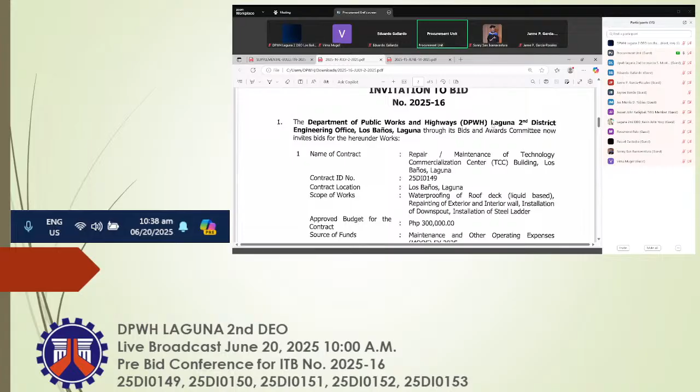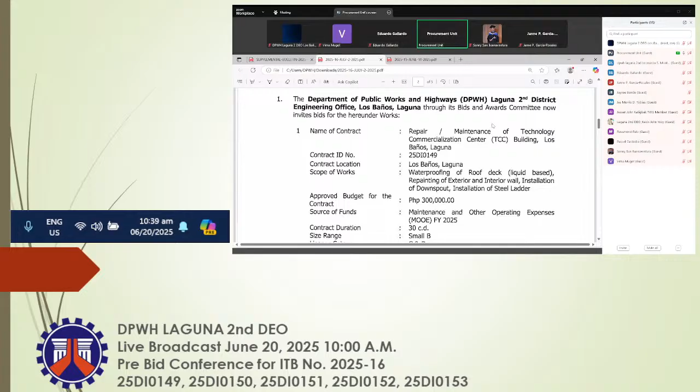For invitation to bid number 2025-16, our first project: Repair Maintenance of Technology Commercialization Center, TCC Building, Los Banos, Laguna, with contract ID number 25DI0149, with approved budget for the contract amounting to 300,000 pesos.

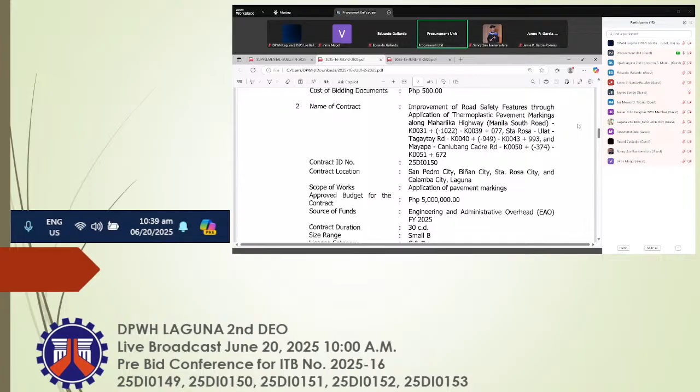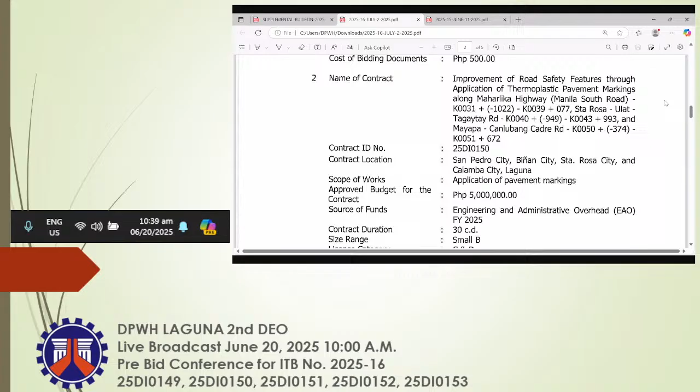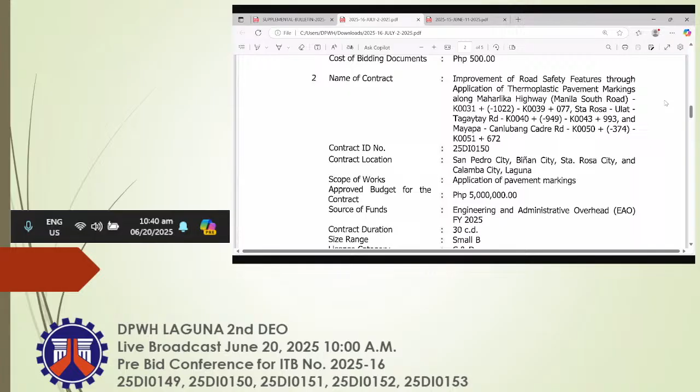Next, improvement of road safety features through application of thermoplastic pavement markings along Maharlika Highway, Manila South Road, kilometer 31 plus minus 1022 to kilometer 39 plus 077; Santa Rosa, Ulat, Tagaytay Road, kilometer 40 plus minus 949 to kilometer 43 plus 993; and Mayapa, Canlubang, Cadre Road, kilometer 50 plus minus 374 to kilometer 51 plus 672. With contract ID number 25DI0150 and approved budget for the contract of 5 million pesos.

For our third project, asphalt overlay along Calamba, Santa Cruz, Famy Junction Road, kilometer 57 plus 939 to kilometer 57 plus 986, with contract ID number 25DI0151, with approved budget for the contract amounting to 4,075,000 pesos.

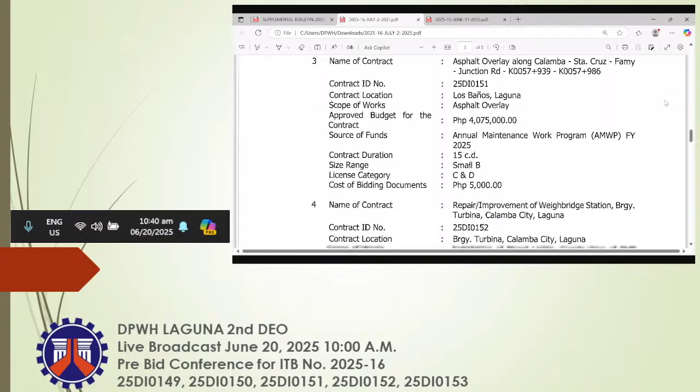Next, repair improvement of Weighbridge Station, Barangay Turbina, Calamba City, Laguna, with contract ID number 25DI0152 and approved budget for the contract amounting to 5 million pesos.

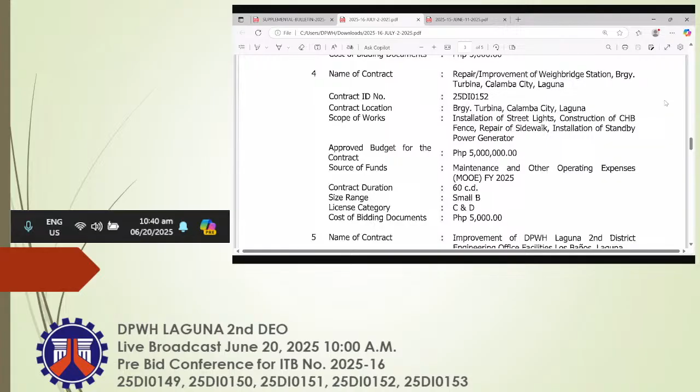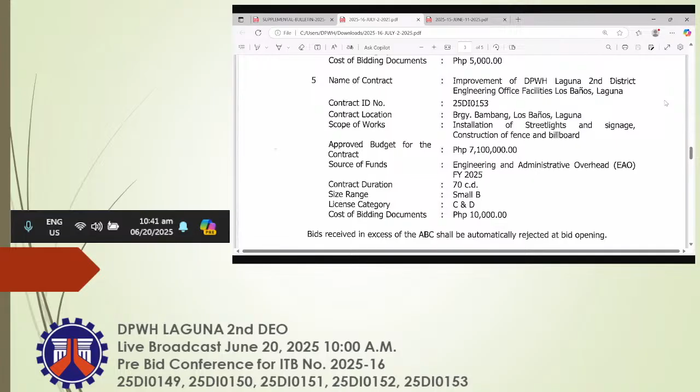And our last project, improvement of DPWH Laguna 2nd District Engineering Office Facilities, Los Banos, Laguna, with contract ID number 25DI0153, with approved budget for the contract amounting to 7,100,000 pesos.

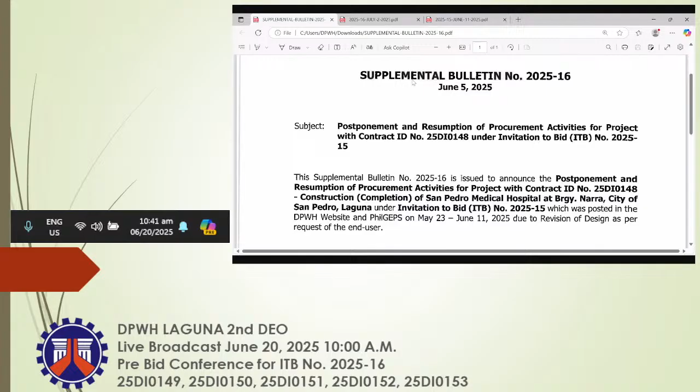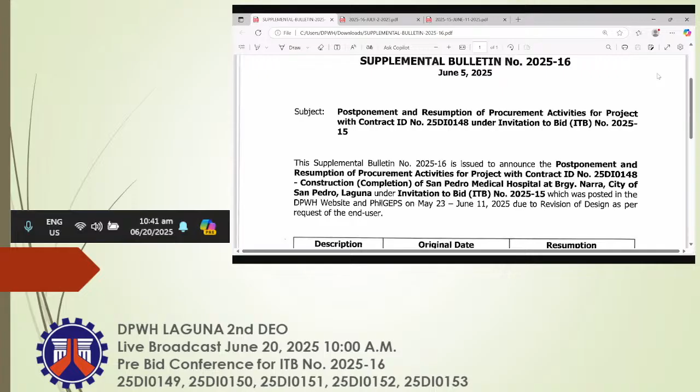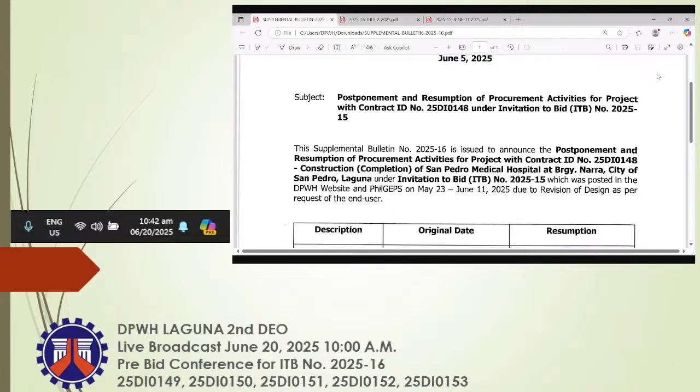We have supplemental bulletin number 2025-16, subject: postponement and resumption of procurement activities for project with contract ID number 25DI0148 under invitation to bid number 2025-15. This supplemental bulletin is issued to announce the postponement and resumption of procurement activities for project with contract ID number 25DI0148, construction completion of San Pedro Medical Hospital at Barangay Narra, City of San Pedro, Laguna, under invitation to bid number 2025-15, which was posted in the DPWH website and PhilGEPS from May 23 to June 11, 2025, due to revision of design as per request of the end user.

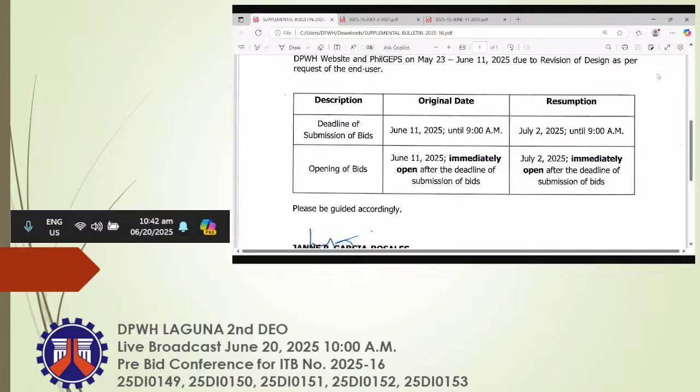Deadline of submission of bids: original date June 11, 2025 until 9 a.m., resumption July 2, 2025 until 9 a.m. Opening of bids: original date June 11, 2025, immediately after the deadline of submission of bids; resumption July 2, 2025, immediately after the deadline of submission of bids.

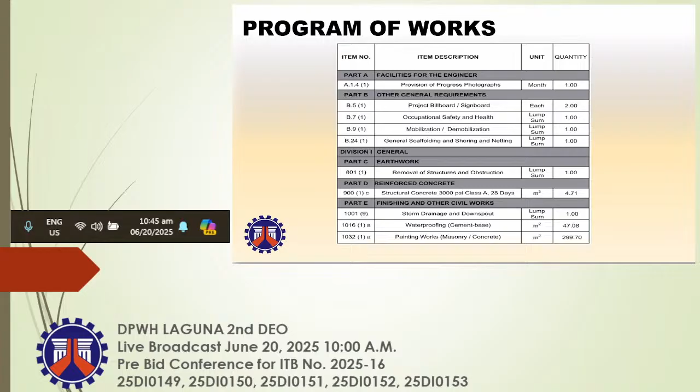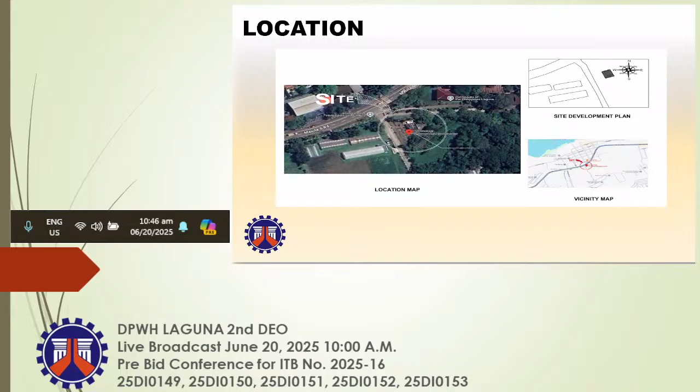Here's the plan and scope of works to be done on our building: repainting of exterior and interior walls, and waterproofing of the roof deck.

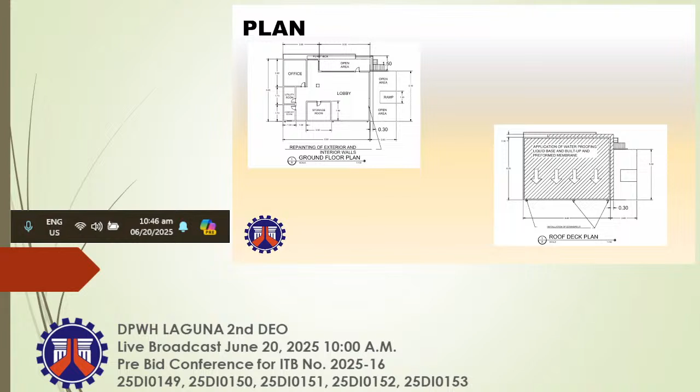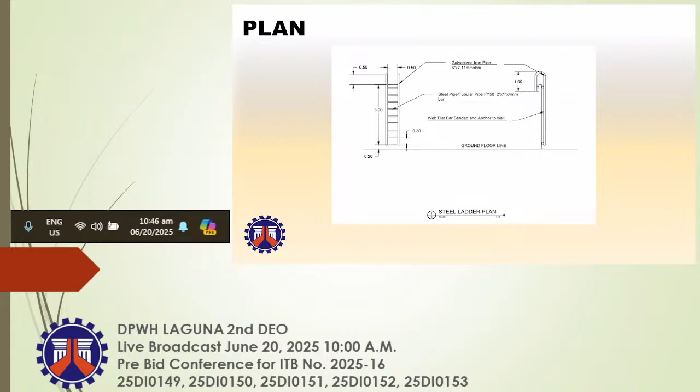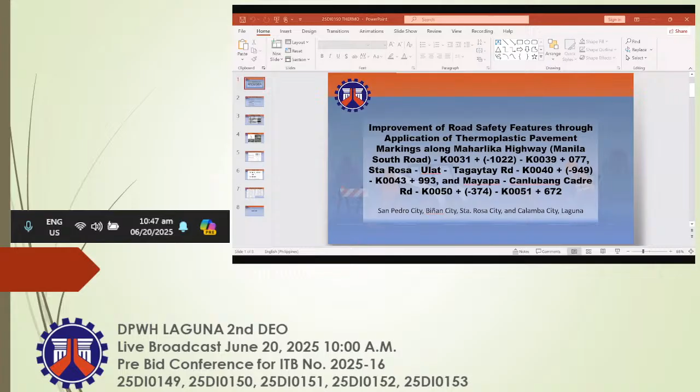For the second project is the improvement of road safety features through application of thermoplastic pavement markings along Maharlika Highway, Manila South Road, from kilometer 31+022 to kilometer 39+077; Santa Rosa Ulat Tagaytay Road from kilometer 40+949 to kilometer 43+993; and Mayapa Canlubang Cadre Road, kilometer 50+374 to kilometer 51+672.

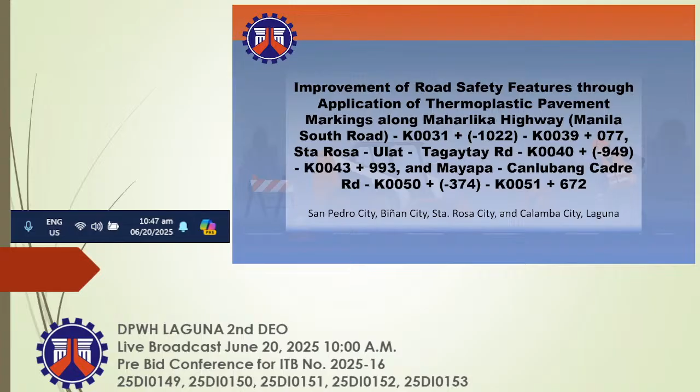Project information: the project has a net length of 7.79 kilometers. Project description: application of thermoplastic pavement markings on national roads, with an ABC costing 5 million pesos. Project duration is 30 calendar days.

Here's the program of works. For part A, provision of progress photographs. Part B, project billboard signboard, occupational safety and health program, traffic management, and mobilization/demobilization. For part H, reflectorized thermoplastic pavement markings in white and in yellow.

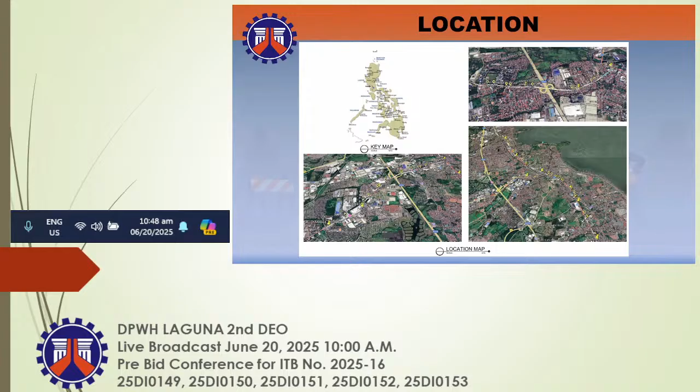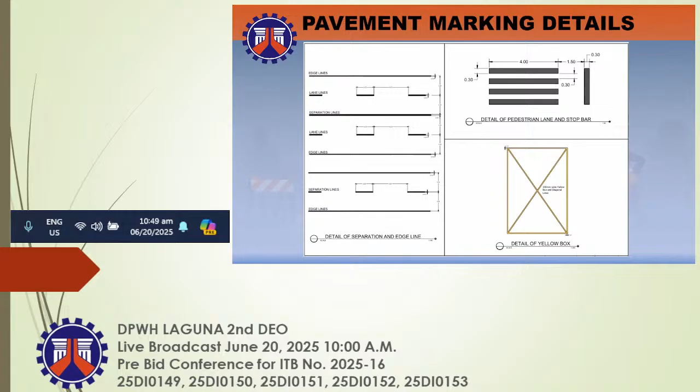Here's the location of the project. Details of the separation and edge line, pedestrian lane, stop bar, and detail for the yellow box. Here's the layout plan.

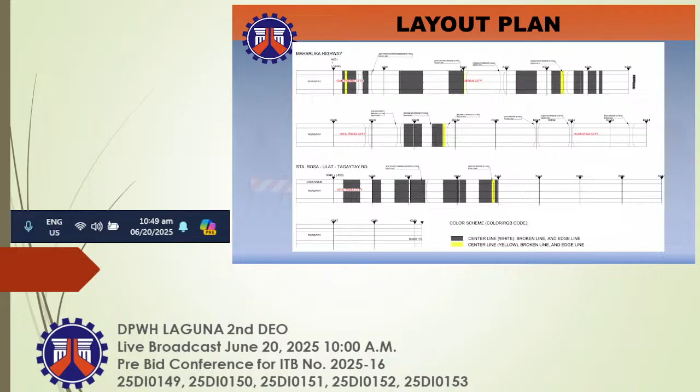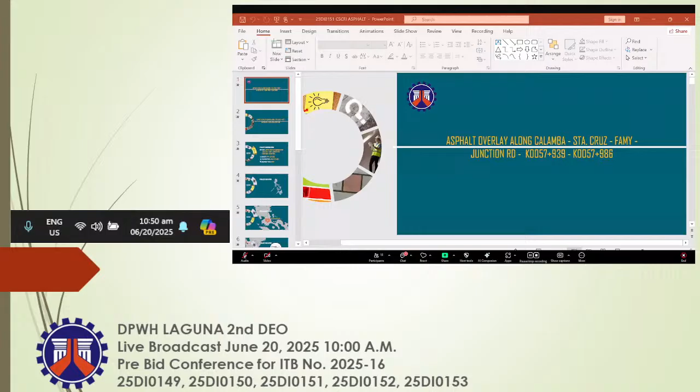The third project is asphalt overlay along Calamba, Sta. Cruz, Famy Junction Road from kilometer 57+939 to kilometer 57+986.

As mentioned earlier, the project amounts to 4,075,000 pesos. Source of fund is the WFP.

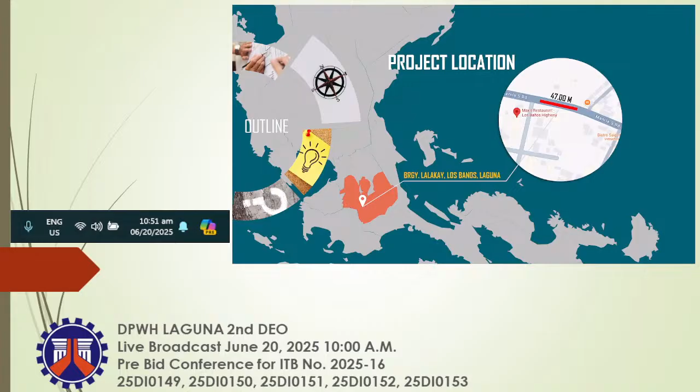Project location is Barangay Lalakay, Los Banos, Laguna, near Max's restaurant, for a stretch of 47 meters.

Item of works: Part A, provision of photographs. Part B, project billboard signboard, occupational safety and health program, and traffic management. Part C, removal of actual structures and obstruction.

Part D, aggregate sub-base course. Part E, emulsified asphalt and bituminous concrete surface wearing and binding, and Portland cement concrete pavement (PCCP), 0.28 meter thick. Miscellaneous works include reflectorized thermoplastic pavement markings in white.

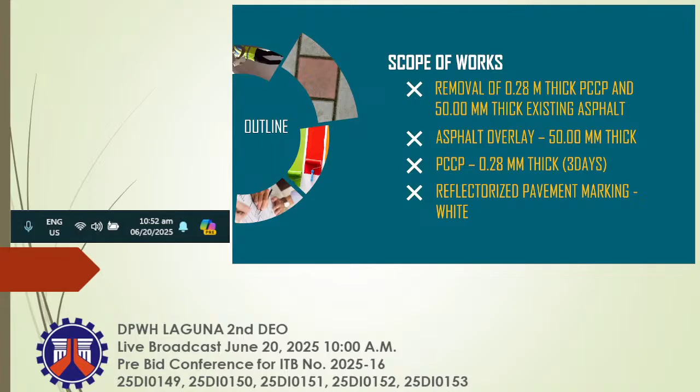The outline includes removal of 0.28 meter thick PCCP and existing 50 mm thick asphalt overlay, construction of a new 0.28 meter thick PCCP, and reflectorized pavement markings.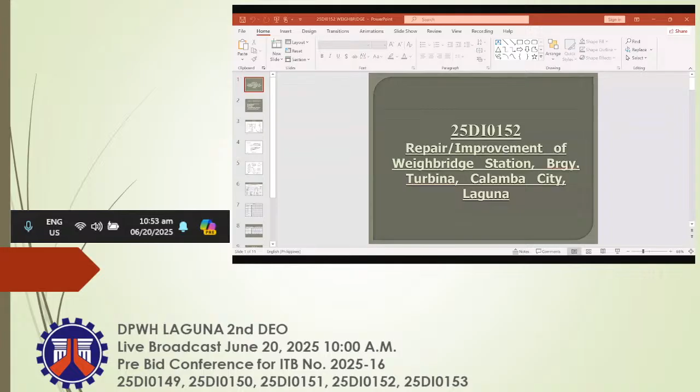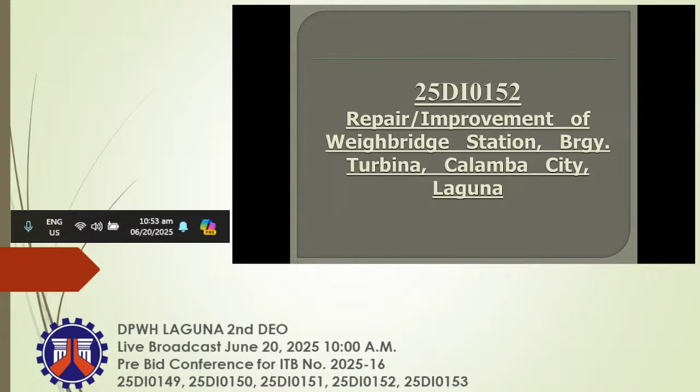For the fourth project, with contract ID number 25DI0152: repair and improvement of Weighbridge Station, Barangay Turbina, Calamba City, Laguna. Project allocation, ABC is 5 million pesos, duration 60 days.

Scope of works: installation of street lights, construction of CHB fence with painting, repair of sidewalk, and installation of standby power generator.

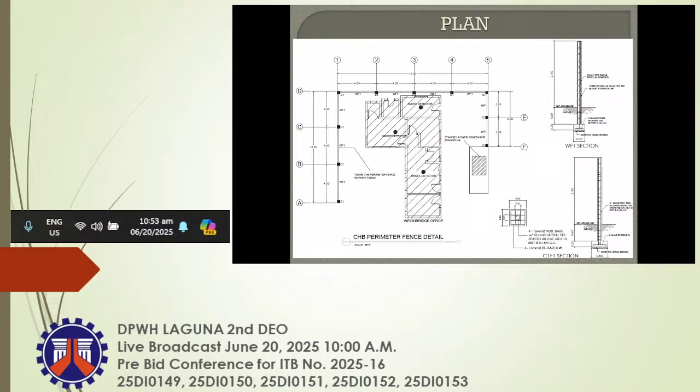Here's the plan for the perimeter fence with details. Here's the location of the street lights, and the sidewalk rehabilitation.

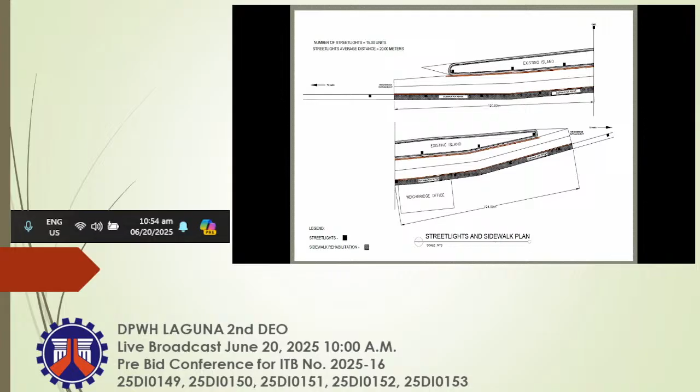Here are the street light details, typical street light details. And here's the program of works.

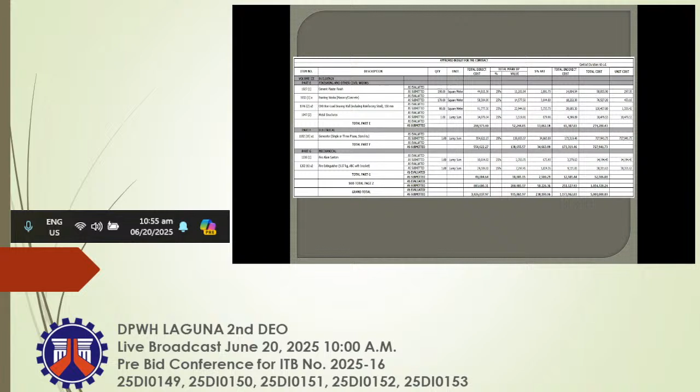For the buildings portion: cement plaster finish, painting works, CHB non-load bearing wall, and metal structures. Part F covers the generator. Part G is the fire alarm system and fire extinguisher.

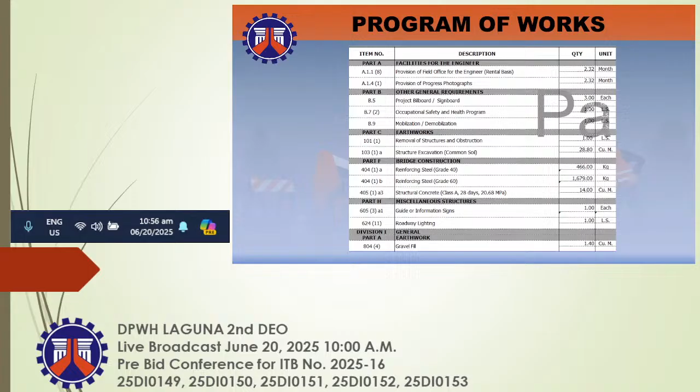The program of works: Part A, provision of field office of the engineer, and progress photographs. Part B, project billboard signboard, occupational safety and health program, mobilization and demobilization. Part C, removal of structures and obstruction, structure excavation. Part F, reinforcing steel grade 40 and grade 60, and structural concrete, 28 days, 21 megapascal. Part H is guide or information signs and roadway lighting.

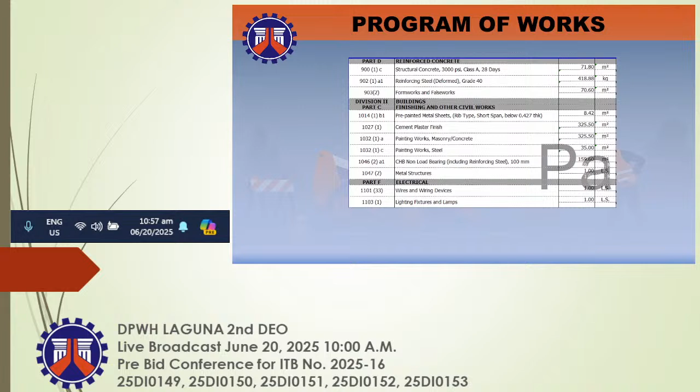In Division 1, Part A, earthwork gravel fill. Part D, reinforced concrete, structural concrete, reinforcing steel, formworks and false works. In Division 2, Part C, pre-painted metal sheet, cement plaster finish, painting works, masonry concrete and steel, and CHB non-load bearing 100 mm thick, and metal structures. For Part F, wires and wiring devices, lighting fixtures and lamps.

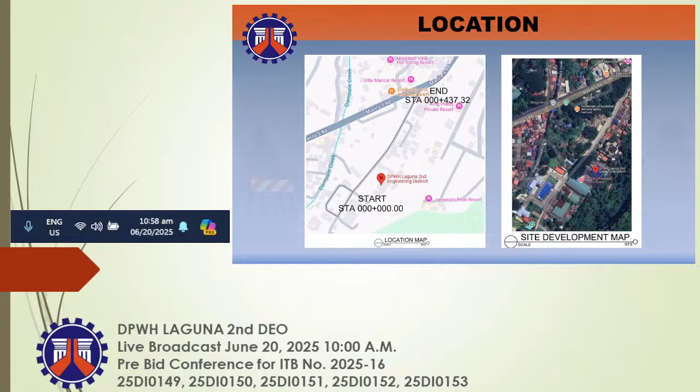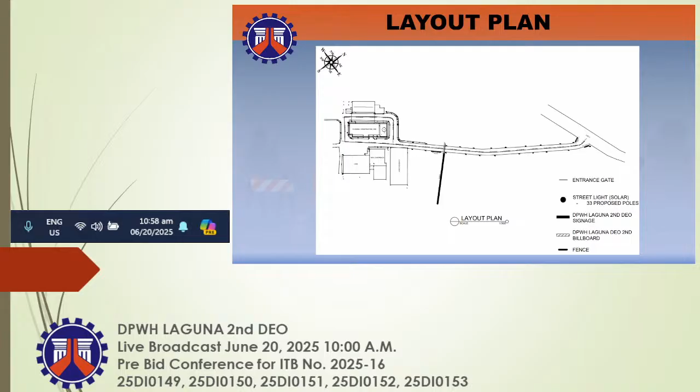So this is the location of the project here at the office. For the layout plan, the legend shows the entrance gate, street light, signage, DPWH Laguna 2nd DEO billboard, and the fence.

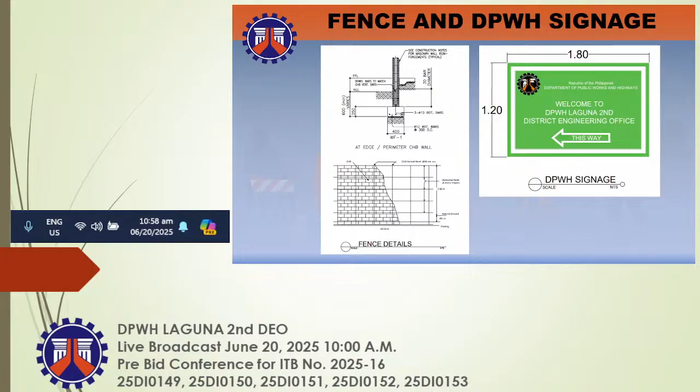If there are any concerns and questions. That's the final project. Thank you.

Good morning everyone. I will discuss the major category of works and the PCAB category for those interested or prospective bidders who want to join our bidding. Please just take note of this.

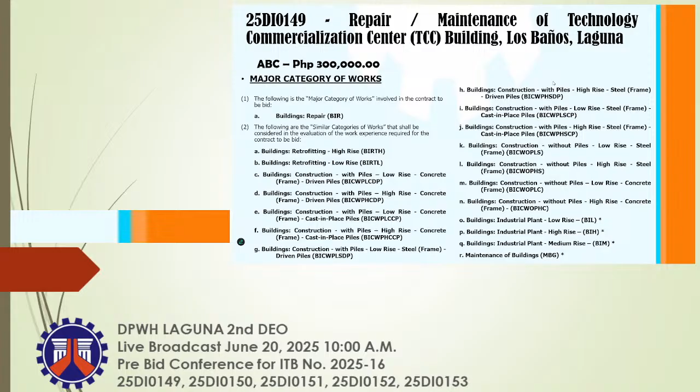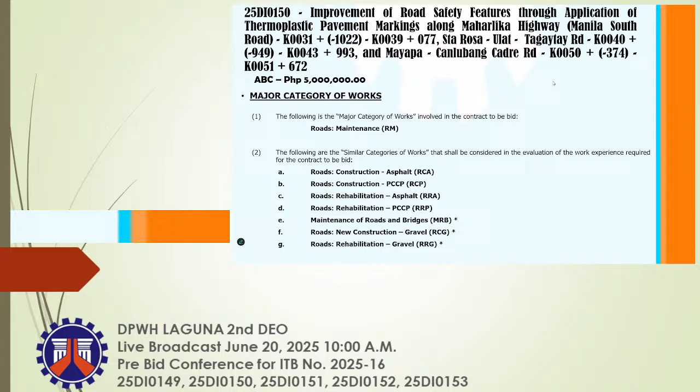For the next project, 25DI0150, improvement of road safety features through application of thermoplastic pavement markings along Maharlika Highway, kilometer 31 plus negative 1022 to kilometer 39 plus 077, Santa Rosa-Ulat-Tagaytay Road, kilometer 0040 plus negative 949 to kilometer 043 plus 993, and Mayapa-Canlubang-Cadre Road, kilometer 0050 plus negative 374 to kilometer 51 plus 672, with an ABC of 5 million pesos. The major category of works for the following are mostly roads maintenance, construction, and rehab. If you wish to join, your PCAB license should have a license category of C&D and classification of Small B.

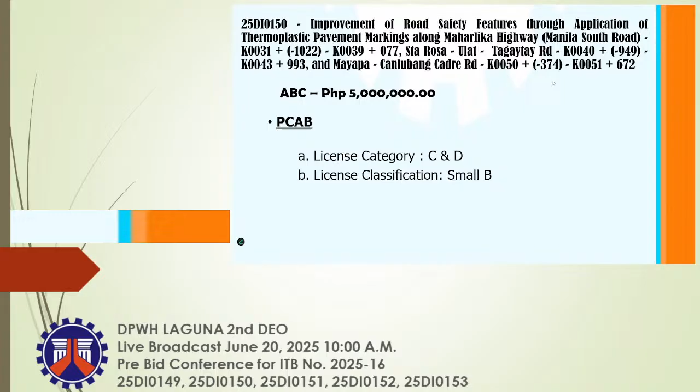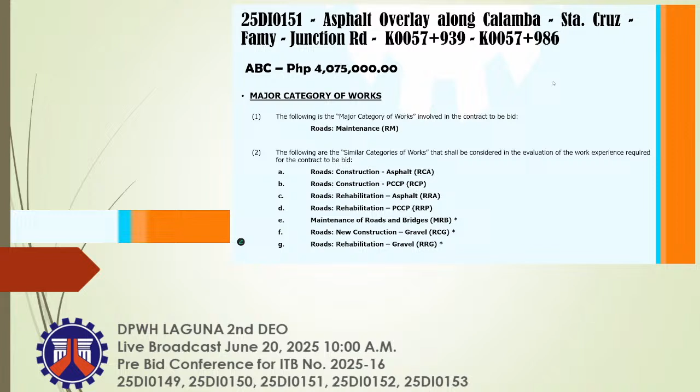For the third project, 25DI0151, asphalt overlay along Calamba-Santa Cruz-Famy Junction Road, kilometer 57 plus 939 to kilometer 57 plus 986, with an ABC of 4,075,000 pesos. The major category of works are the following. If you want to join our bidding, your PCAB license should have a license category of C and D and classification of Small B.

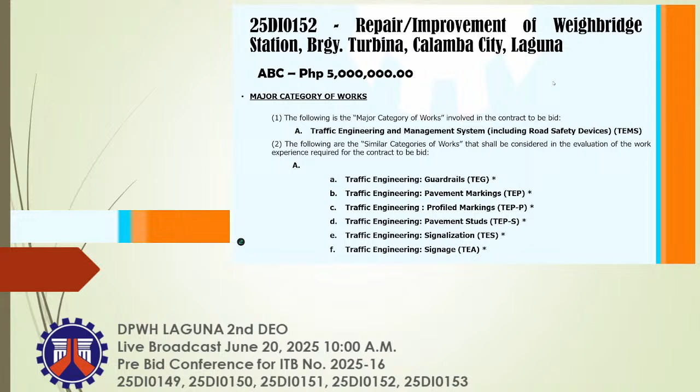For the fourth project, 25DI0152, repair and improvement of Weighbridge stations, Barangay Turbina, Calamba City, Laguna, with an ABC of 5 million pesos. The major category of works are mostly traffic engineering. If you want to join the bidding, your PCAB license should have a category of C&D and classification of Small B.

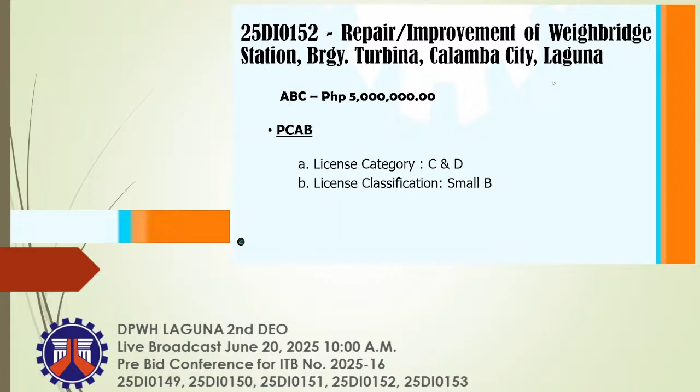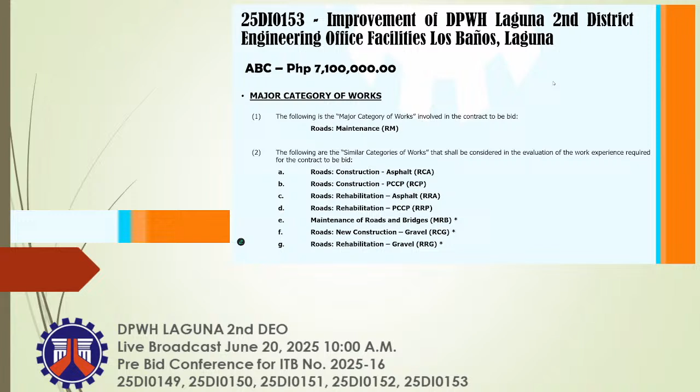For the last project, 25DI0153, improvement of DPWH Laguna 2nd District Engineering Office Facilities, Los Banos, Laguna, with an ABC of 7,100,000 pesos. The major category of works are mostly roads maintenance, construction, rehab, etc. If you want to join the bidding, your PCAB license should have a category of C&D and classification of Small B. That ends my presentation. Please check for any comments or questions. Since there are none, thank you very much.

Again, for this pre-bid conference, with ITB number 2025-16 and contract ID numbers 25DI0149 to 25DI0153, our agenda covers project data, requirements of bidding documents, bid forms, technical and financial proposals, criteria for eligibility screening, preliminary examination of bids, evaluation of bids, and post-qualification.

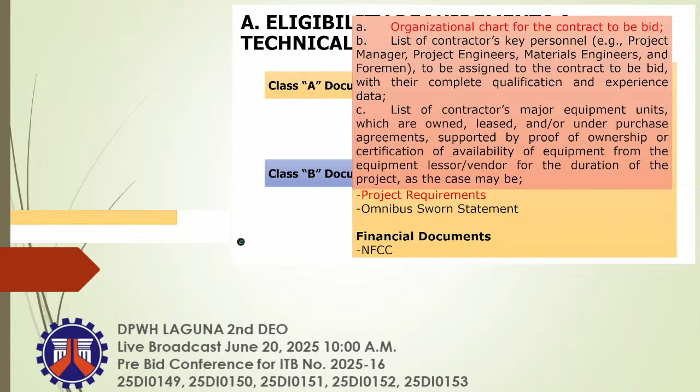Experience means total years of civil works experience of any nature in construction and engineering consultancy services. Include the tax identification number of the key personnel, compliance to D.O. 98 series of 2016. Include the contact number of the materials engineer.

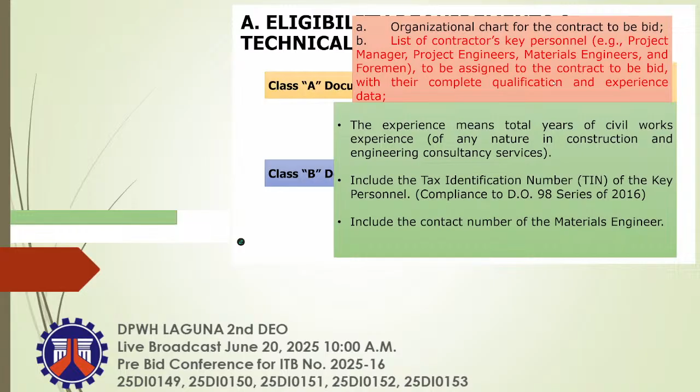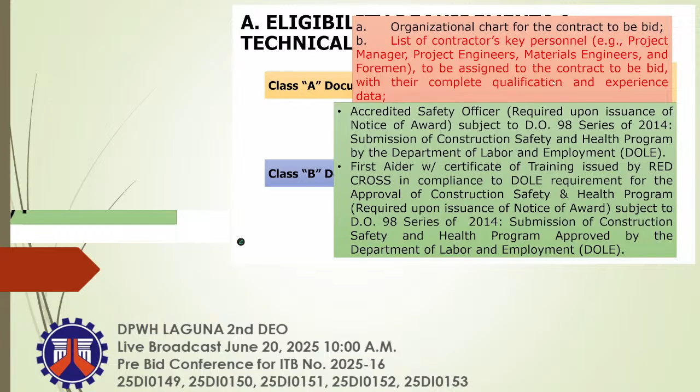Accredited safety officer required upon issuance of notice of award, subject to D.O. 98 series of 2014, or the submission of a construction safety and health program by the Department of Labor and Employment. First aider with certificate of training issued by Red Cross in compliance with the requirement for the approval of the construction safety and health program, also subject to D.O. 98 series of 2014.

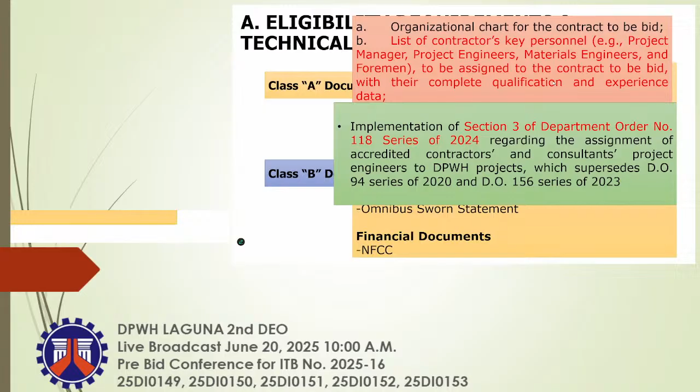Implementation of Section 3 of Department Order Number 118 series of 2024 regarding the assignment of accredited contractors' and consultants' project engineers to DPWH projects, which supersedes D.O. 94 series of 2020 and D.O. 156 series of 2023.

For PE2, limits of assignment: 10 contracts located within the same province for simultaneous assignments, each costing more than 150 million. For PE1: 11 contracts located within the same province for simultaneous assignments, each costing 100 million to 150 million.

Provisional project engineer: 10 contracts located within the same province for simultaneous assignment, each costing less than 100 million.

To continue, the Omnibus Sworn Statement: original duly signed Omnibus Sworn Statement, and if applicable, original notarized secretary's certificate in case of a corporation, partnership, or cooperative, or original special power of attorney, and all members of the joint venture giving full power and authority to its officer to sign the OSS and do acts to represent the bidder.

The net financial contracting capacity, or NFCC, of the bidder shall be used in the eligibility processing. A prospective bidder must have an NFCC at least equal to the ABC to be procured, as follows.

NFCC equals current assets minus current liabilities, multiplied by 15, and...

the value of portions of all outstanding works under ongoing contracts, including awarded contracts yet to be started, which portions coincide with the contract to be bid, will be subtracted. In the NFCC, the fixed factor of 15 shall be used in the computation of NFCC regardless of the contract duration.

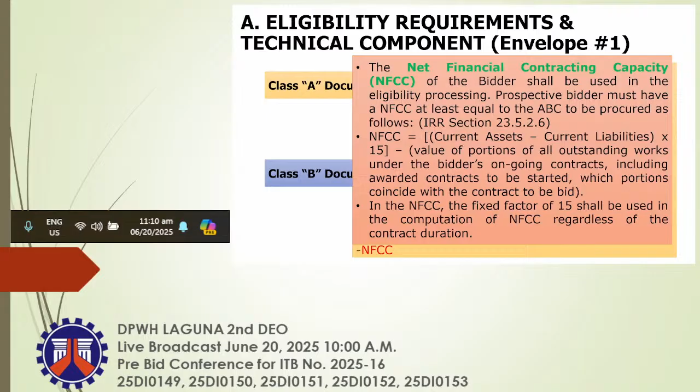For Class B documents: special PCAB joint venture license and valid joint venture agreement. If applicable, duly signed joint venture agreement in accordance with RA Number 4566 and its IRR, in case the joint venture is already in existence, or duly notarized statements from all the potential joint venture partners stating that they will enter into and abide by the provisions of the JVA in the instance that the bid is successful.

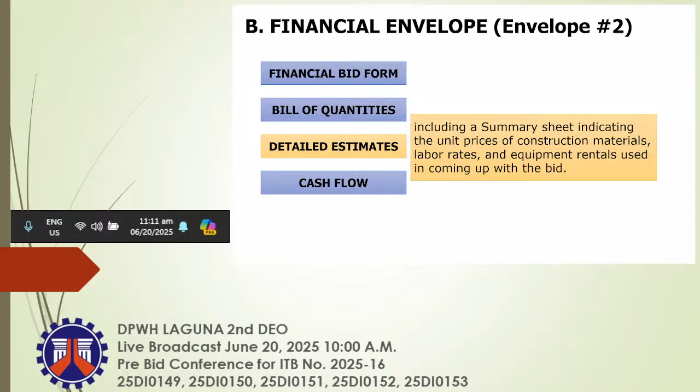For the financial envelope, or envelope number 2, we have the financial bid form in accordance with the prescribed form, bill of quantities and bid prices, detailed estimates including a summary sheet indicating the unit prices of construction materials, labor rates, and equipment rentals used in coming up with the bid, and the cash flow, quarterly and monthly, with payment schedule.

All envelopes shall contain the name of the contract to be bid in capital letters. They shall bear the name and address of the bidder in capital letters, be addressed to the procuring entity's BAC, bear the specific contract identification of the bidding process, and bear a warning: do not open before the date and time for the opening of bids.

The bidder shall enclose their original eligibility and technical documents in one sealed envelope marked original technical component, and the original financial component in another sealed envelope marked original financial component, sealing them all in another envelope marked original bid. Each copy of the first and second envelopes shall be similarly sealed, duly marking the inner envelopes as copy number 1 or 2 technical component and copy number 1 or 2 financial component, and the outer envelope as copy number 1 or 2. These envelopes containing the original copies shall then be enclosed in one single envelope.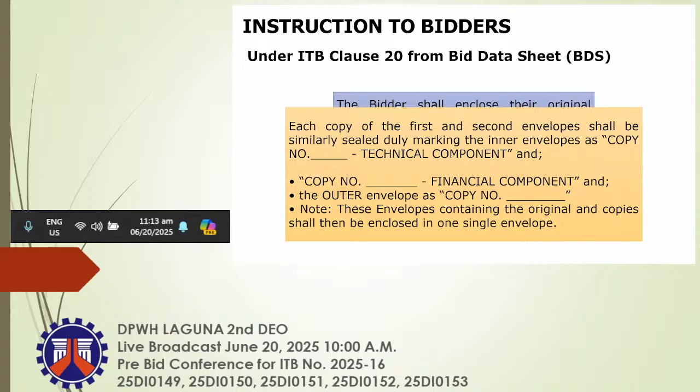The bid documents, both technical and financial proposal, must be book-bound or fastened at the left side with an ear tag, in A4 size bond paper, font size 10 or up, in 70 to 100% scale, with documentary stamps, and paginated as per DO number 90, series of 2002.

Please refer to DO 11 series of 2017 for the minimum materials testing equipment, and DO 127 series of 2018 for the strict application of RA 9184 in the conduct of post-qualification of bidders with delayed ongoing contracts with the DPWH. DO 11 series of 2017 covers the inclusion of the minimum materials testing equipment in the technical component of the bid.

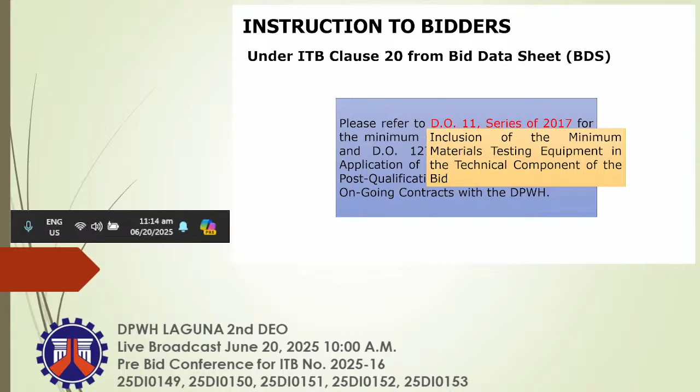Electronic submission and receipt of bids. Legal references: Department Order Number 87, Series of 2020, on electronic submission and receipt of bids for the procurement of civil works contracts; GPPB Resolution Number 09-2020, dated May 7, 2020, approving measures for the efficient conduct of procurement activities during a state of calamity or implementation of community quarantine or similar restrictions, authorizing the submission and receipt of bids through electronic means or email; and the 2016 Revised IRR of RA 9184.

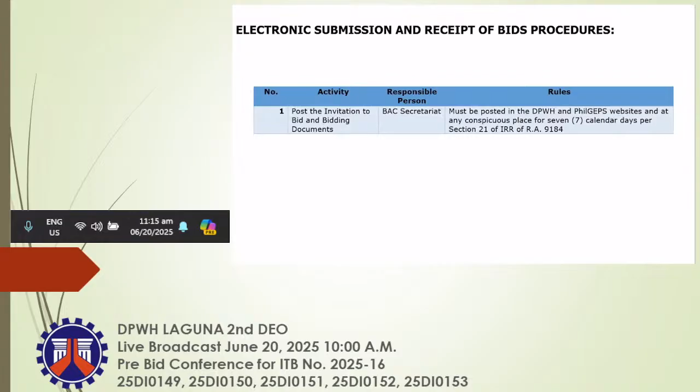Electronic submission and receipt of bids procedures. Number 1: Post the invitation to bid and bidding documents. Responsible person: BAC Secretariat. Rules: must be posted on the DPWH and PhilGEPS websites and at any conspicuous place for 7 calendar days, per Section 21 of the IRR of RA 9184.

Number 2: Create the contract ID folder in the eBid portal. Responsible person: BAC Secretariat. Rules: shall be done upon posting of the invitation to bid and bidding documents. The folder name should be consistent with the contract ID scheme provided under DO number 33, series of 2018. Here are the examples.

Number 3: Purchase the bidding documents. Responsible person: contractor. Rules: Section 17.4 and Appendix 8, Guidelines on the Sale of Bidding Documents, of the IRR of RA 9184.

Number 4: Send the proof of purchase of bidding documents, official receipt. Responsible person: contractor. Rules: item number 3A of DO number 87, series of 2020. File format: PCAB ID _ Contract ID _ Official Receipt.pdf. Email subject format: Official Receipt for Contract ID. Must be in PDF, must be sent prior to the deadline of submission of bids. Only bidders with system-accepted proof of payment shall be allowed to submit their electronic bids. Here are the examples.

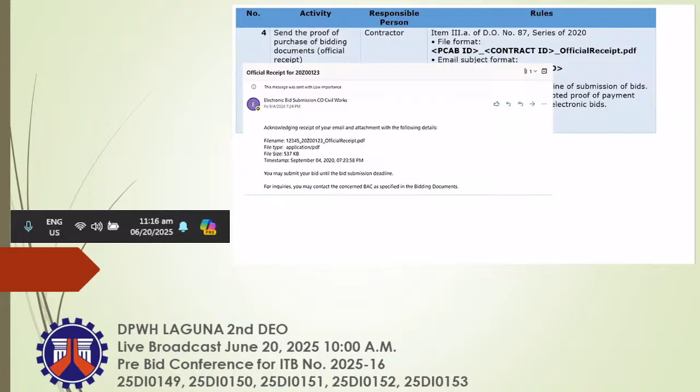Number 5: Send the electronic bid. Responsible person: contractor. Rules: item numbers 3D, 3E, 3I, and 3M of DO number 87, series of 2020. File format: PCAB ID _ Contract ID _ BID.zip, .rar, or .7z. Email subject format: Bid Submission of Contract ID. Must be in a password-protected archive format, and shall contain 2 password-protected archive files, the technical and the financial proposal.

Number 6: Send the electronic bid if split into 2 due to attachment file size limitation of the email service provider used. Responsible person: contractor. Rules: item number 3I of DO number 87, series of 2020. Email subject format: Bid Submission 1/2 for Contract ID, and Bid Submission 2/2 for Contract ID. Here are the examples.

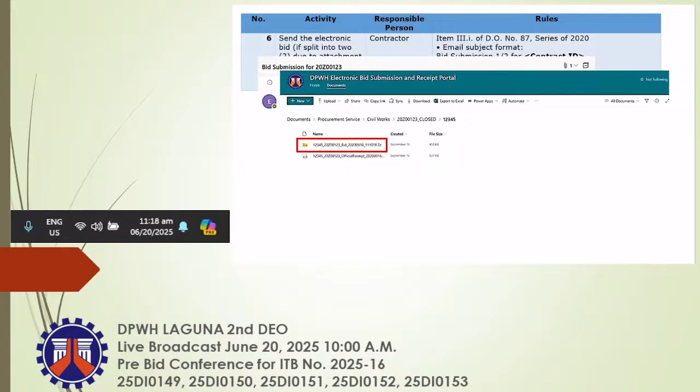Electronic bid, main archive file. Under these are the technical proposal archive folder and the financial proposal archive folder. Under the technical proposal archive folder is the technical proposal folder, and under that is the technical documents PDF. Under the financial proposal archive folder is the financial proposal folder, and under this is the financial documents PDF.

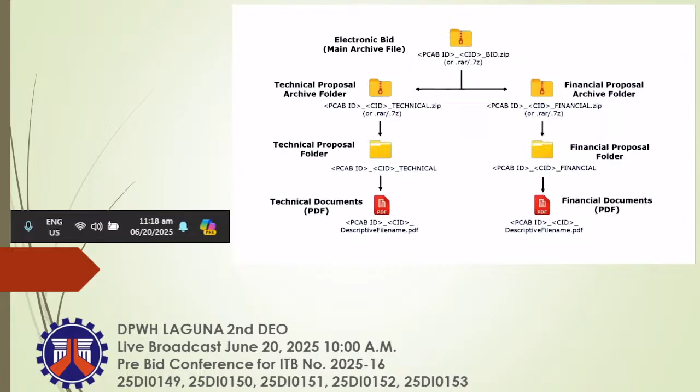Number 7. Send the bid modification, if any. Responsible person: contractor. Rules: Item number 3J and number 3M of DO number 87, series of 2020. File format: Pickup ID_contract ID_bid_modification_x.zip or RAR/.7z. Email subject format: Bid modification X for contract ID number, where X represents the number of bid modification submitted. Must be in a password-protected archive format.

Number 8. Send the letter of non-participation, if any. Responsible person: contractor. Rules: Item number 3K of DO number 87, series of 2020. File format: Pickup ID_contract ID_non-participation.pdf. Email subject format: Non-participation for contract ID, must be in PDF.

Number 9. Send the letter of bid withdrawal, if any. Responsible person: contractor. Rules: Item number 3L of DO number 87, series of 2020. File format: Pickup ID_contract ID_bid withdrawal.pdf. Email subject format: Bid withdrawal for contract ID, must be in PDF.